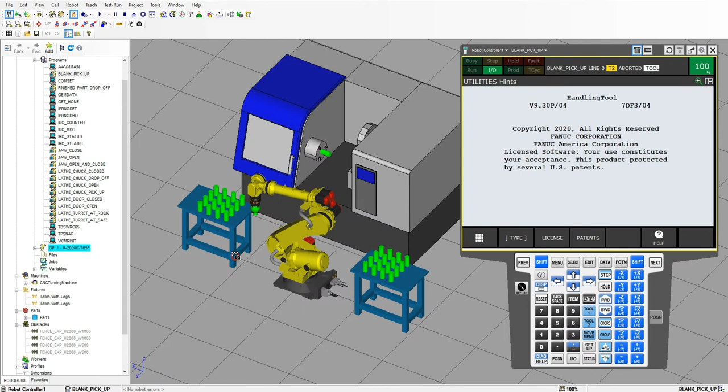Good afternoon. In this video, we're going to start programming our cell, and we're going to do this in multiple videos just because it's a little bit longer and we want to break up the videos just a little bit. But basically, we're going to start out with programming the initial pickup area. So let's look at some of the programs that we have created already.

Let's first look into the data registers that we are going to have set up. So the first data register is going to be a counter just in case we have it. And then we have our start row and column. So this is meant for counting which part are we going to be on per row and per column. We also need one for the end. So we did column end and row end. So this is going to be our placement.

Then let's go into our position registers. Inside our position registers, we have a couple saved points. The first one is this home position, which the robot is at right now. We have a pickup position, which is the first initial part. And then we have the lathe chuck position. And then we have the placement position. Now both the pickup and place positions are going to be changing as we manipulate that position register.

Going down, we have our offsets. So this is the number in which we're going to offset from left and right to do the rows and columns. So we have our offsets for the in feed, and then we have the offsets for the out feed. We also have a couple tool offsets because we're going to come down at a safe position and then back up to that safe position. We're going to utilize our tool offset. And then because we're in a little bit more confined space when it comes to the lathe, we made a lathe tool offset as well.

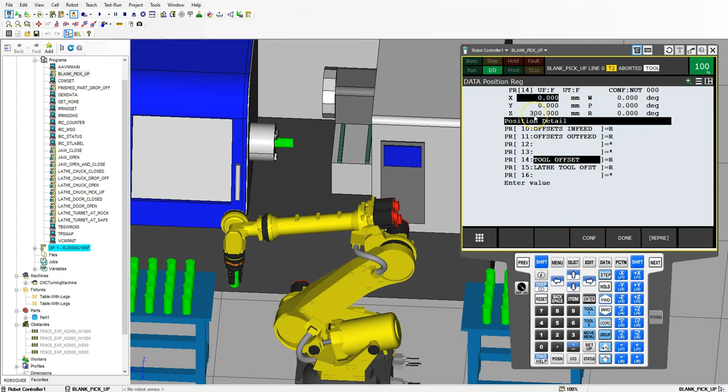Now the numbers that we put into this, we initialized it as zeros. We don't have to worry about this actual number because we're going to initialize it in our actual program, but just to show that it was at zeros, and we have it set at right now 300, but that may change depending on how the program actually plays out. So those are going to be the main position registers and data registers we're going to utilize.

We're going to be using tool frame number 1, which is our gripper, which we modified to be a little bit smaller so we can fit inside the lathe a little bit easier. And then we also have our frame 0, which is going to be our world mode, which everything's going to be based off our 000 for our robot. Going on up here, if I go to my blank pickup, so here's my pickup program. Again, these are simulation programs to represent that we are picking something up and then we're also placing it.

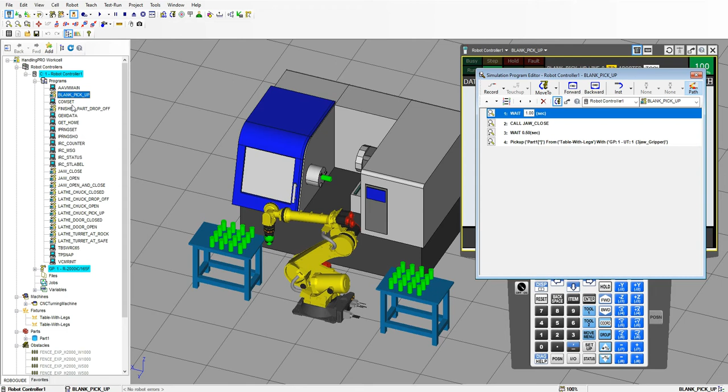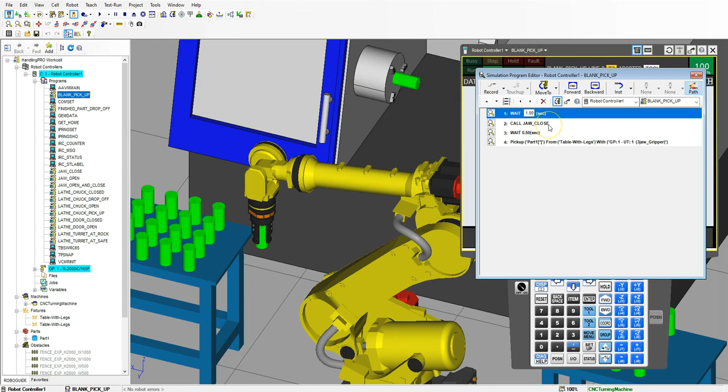In actual programming, you would have either a robot output or a digital output and picking up your device. So robot output may be hooked up to your solenoid or some sort of electronic device. So those are going to be your actual outputs. So that's where the simulation and the programming in real life differs a little bit. So if we go to the blank pickup, this is where we have the jaw close, and then we have the finish part drop off, which is over here. So these two are going to be the pickup and the drop off.

Then we have the programming for our actual jaw open and jaw close. So if I close this out and then I go to our program, so here is our jaw close, which is going to be a digital 1 output of off, and then it's waiting until that happens. And then we have jaw open, which means digital 1 is on, and we're waiting for digital 1 input to be on as well. So jaw open and close was a program that we did. We can actually delete this one so we don't get confused.

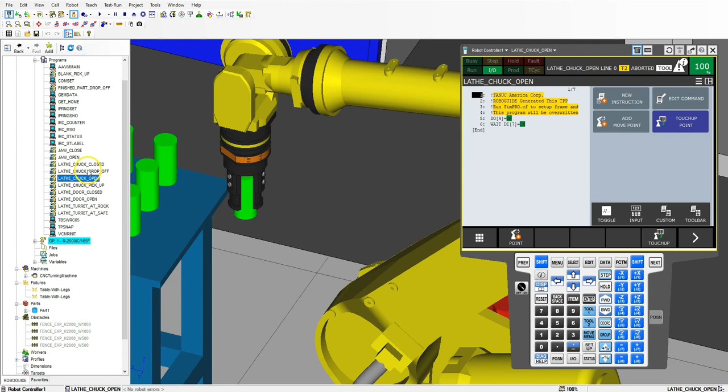Then we have the lathe chuck close and lathe chuck open. So these are just opposites from each other. We have the chuck drop off. So this is the program in which we drop off the actual part into the chuck. So you can see the lathe chuck opens, it waits a second for that to happen, and then it drops the part off, calls the lathe chuck to close, and then we close it. Then same thing for lathe chuck pick up. So when we grab it, then the chuck opens and then we move it out of the position.

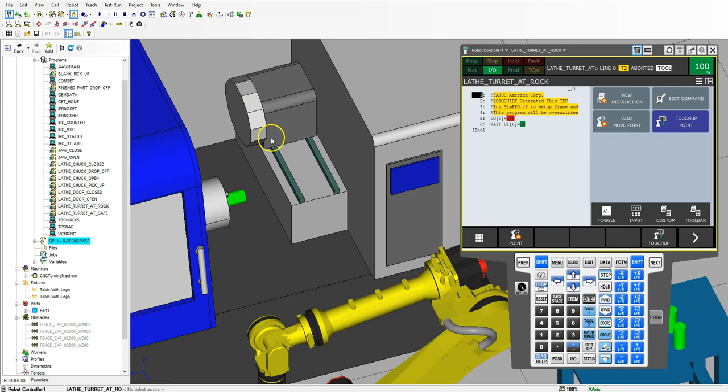We have the lathe door open and close. So basically these are opposites. And then we also have the turret at rock and also in the safe position. So at rock is forward, and then safe position is back. So those are going to be the main simulation programs in which we're going to call upon as we program our robot. Alright, so the first program we're going to create is getting the simulation to be in its start point.

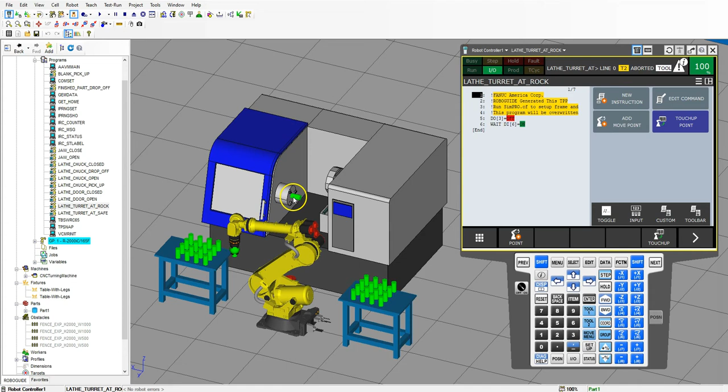So we're going to have our robot in home position, we're going to have our door closed, we're going to have this closed, we're going to have our turret towards the front. So everything initialized so that when we begin our program, everything is at the same start point.

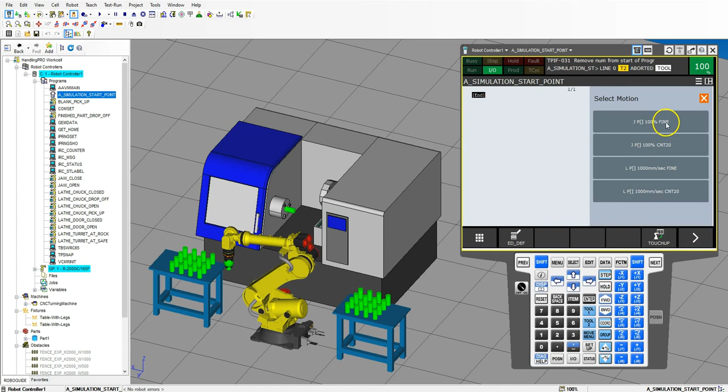So let's go select, and we're going to go create. And this time what I'm going to do is I'm going to put A in the beginning, underscore, and then simulation item start point. So the first thing we're going to do is we're going to make sure that our robot's at home. So let's go add move point, and we're going to do a joint movement, and we're going to use position register number 1, which is our home position.

Now later on we'll actually program a smarter way of doing home position, because right now, depending on where the robot is, if we call home position, it could crash into our devices or our lathe, and it could cost thousands of dollars to fix. We always want to make a smarter home position. So you saw in all these videos so far, I just called out a home position, assuming that the robot's not going to run into anything.

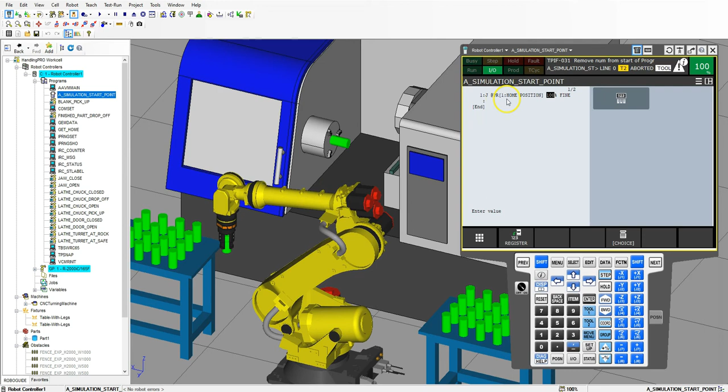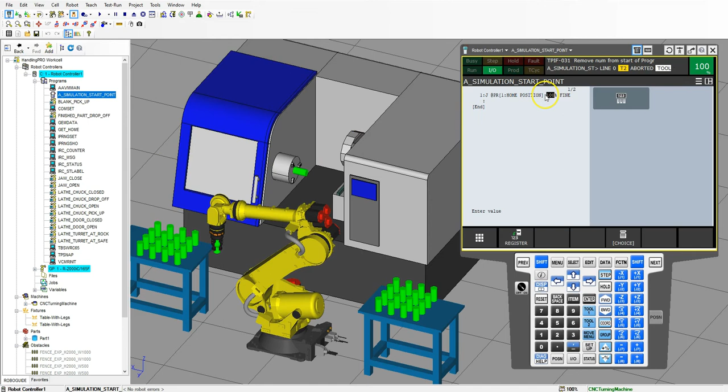Later on, we'll make a very smart home position in which it looks at where the robot is in relationship to the tables, the machines, and the fixtures around it. So it can make a determination based on where it's at to make the best course back to home position without crashing into things. But right now we're going to just call it as a home position because this is a simulation, and we will do this a little bit later.

Let's add the turret in the correct position. So let's go add new instruction, call program, and the first thing we're going to do is lathe turret in rock and roll position. So there's our rock and roll position. Then let's go down to end. Let's go new instruction, call. Next one is going to be the lathe chuck, actual chuck parts, going to be inwards, we'll call it. So lathe chuck closed, because we're going to open it. And then we're also going to call the door closed.

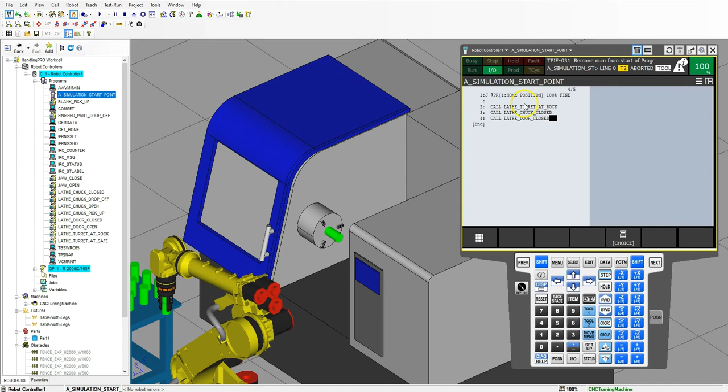So now that we have the lathe turret at rock and roll, we have the door closed, and we also have the chuck closed as well. So this is going to be our simulation starting point. So if we run this, everything is going to be closed, chuck's going to be closed, and then our turret is going to be also towards the front. Let's also make sure that our jaws are open. New instruction, call program, and then here's jaws, and we're going to have them open.

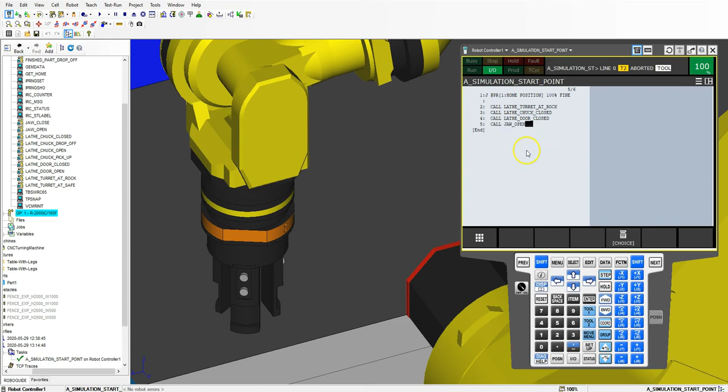So now that everything is set up for our first simulation program, let's make a new program called the master program. So we're going to go select, and we're going to create, and once again I'm going to go A, so everything's in the beginning part. So A, and we're going to call this master lathe program. Enter, and we're going to enter into this.

And the first thing we're going to do is set up our frames. So we're going to new instruction, miscellaneous, remark. Let's add frames to the beginning. And then new instruction, and let's set up our frames. So utool number 1, and then our user frame 0, which is going to be our home 000 based on the robot. Then let's go to edit command, EDCMD, and insert a bunch of lines. So let's insert maybe like 30 so we have some space.

Okay, so the first thing we're going to have is we're going to reinitialize our simulations. So we're going to go new instruction, miscellaneous, remark, and we are going to put in our heading of simulation item start point. So simulation items at start point. And then we're going to call upon that program. So new instruction, call program, and then we're going to have a simulation start point.

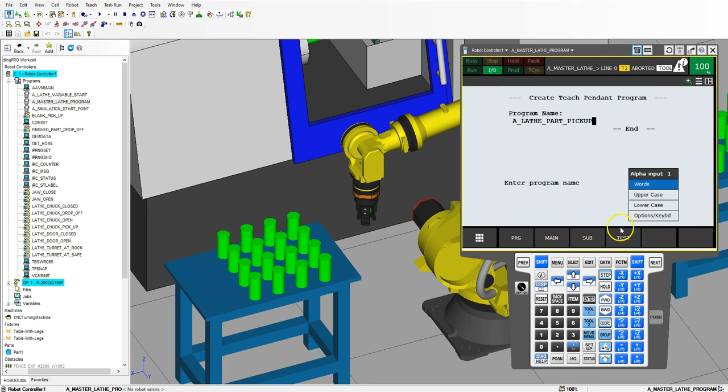So now that we have our variables, let's create our program for our lathe pickup. So let's go to the next row here. And then we're going to go part pickup. So let's create another program for part pickup. So let's go create. And this is going to be a motion program, so we're not going to change that first motion group. And let's go enter, enter. And the first thing we're going to do is set up to make sure our frames are correct.

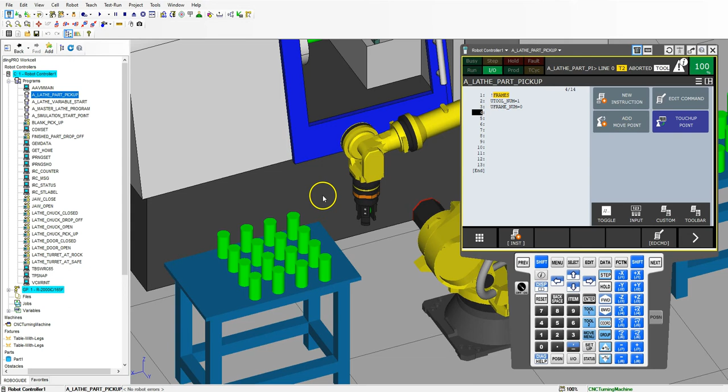So we got our frames. Let's go just like 10 lines or so. Alright, so now that we're in home position, let's just make sure we're at home position. Again, we will make a smarter home position later on. We got our home position, and now we need to go to our starting point. So let's actually go to our program. So this is going to be our actual pickup program.

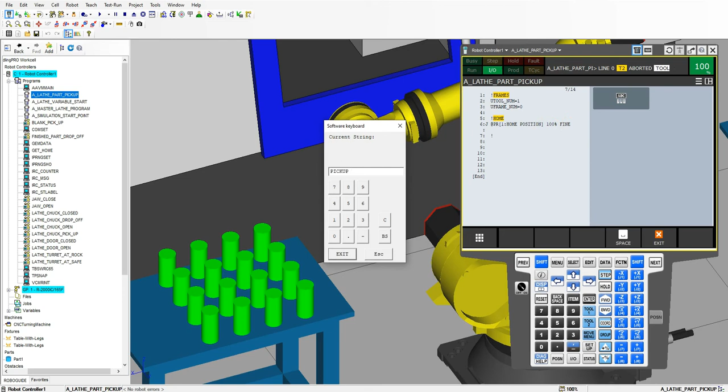So let's add a couple move points. So let's go add move point. And from our home position, we're going to go as a joint movement. Now before we change this, let's just go edit our default motion and make sure that they're what we want. So I have it set as 1000, 1000, continuous motion of 20. I usually go between 20 and 30, and then we have 100%, 20 point. So if you want to modify that before we start programming, just go into the edit add point and then edit our default there. So I usually call it edit definition, but it's just editing our default.

So we're going to go as a joint movement, and then we're going to go linear down to our position. So we're going to linear down to that position, and then we skip one line, and then we're going to pick up, and then we're going to linear back up again. So we're going to add move point, linear back up. So right now you'll see this as position 1, position 2, position 3.

We're going to use a position register for our point. So position register number 2 is going to be our start point. So let's go in here, let's go choice, position register number 2, which is our pickup position, choice, position register number 2, choice, position register number 2.

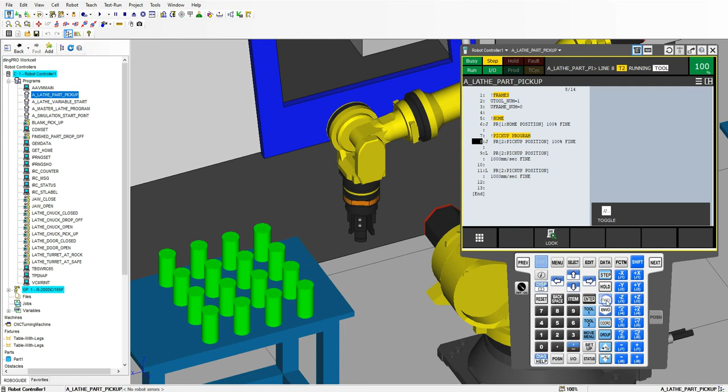So now what we can do is just go step mode and then shift forward, and it'll bring us to that position. So all 3 of these now have the asterisks because we are at that position. Now what we need to do is add our tool offset to this. So arrow all the way to the end and then go tool offset, position register, and we're going to use position register number 14, which is our tool offset.

Then it's going to go down to this position, pick up our part, and then linear back up to our safe position. So let's add our tool offset, position register 14. So let's try this out. Let's run this. There we go. So now we have our position register. Now we need to add our pickup area.

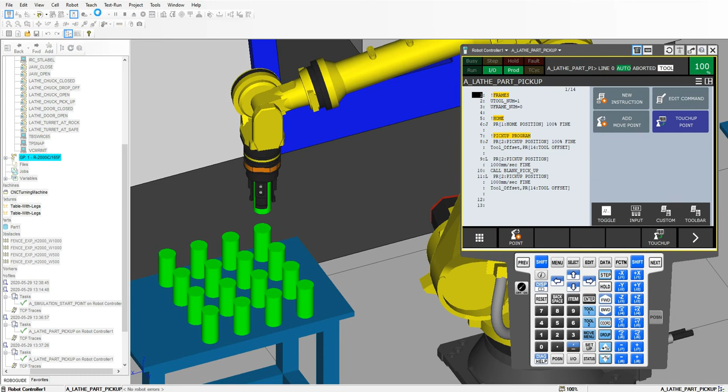So let's go to line 10, the one that we skipped, and let's go new instruction, call program, and then we are going to do our pickup. So the blank pickup, and that'll allow us to pick up that part. So if we run this now, it picks it up. And then if we want, we can go back to our home position afterwards, because it probably makes sense to swing from our home position over.

So let's go to number 12 here, all the way down, and then let's add our home position to the end here. We'll just clean this up just a little bit. So now what I'm going to do is add some headings here so that it's a little bit cleaner and we know exactly what's going on. So I'm going to pause the video and then come back and show you what it looks like. Alright, so I just went back in here and I cleaned it up a bit.

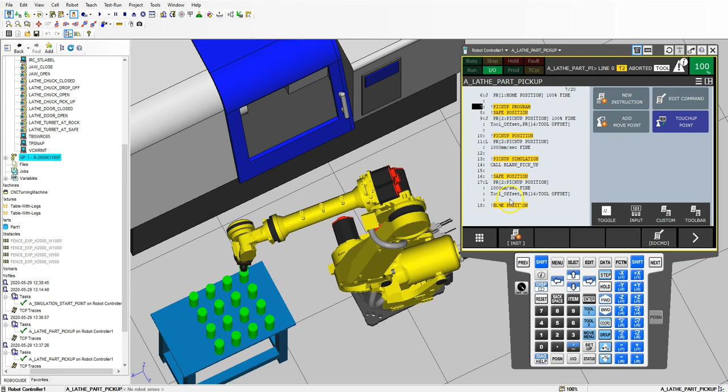So we have our pickup program. So here's our safe position. Here's our pickup position. Here's our pickup simulation. Then we go back up to our safe position, and then we go to our home position. So let's run this and see what it looks like. Goes to our safe position, and now we have our beginning part set up. Inside the main program, that's where we'll actually do the loops, but this is basically the same thing. It's just using the offsets that we're going to utilize.

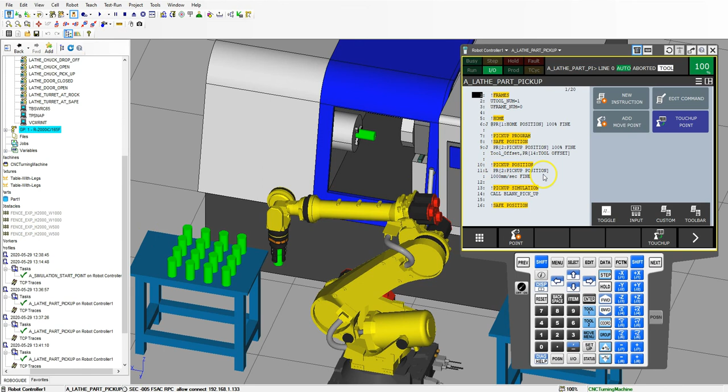So let's go in here also and add our offsets to our program so that we're able to offset left and right as we create it. So we're going to go to the end of our safe position, and we're going to go offset frames, position register, and we're going to use position register number... Let's go to data. Here's our offsets in feed. So we're using position register number 10. So let's go back in there, position register number 10. So let's do that for each one of these.

So just double check to make sure we have position register on each one of these motion groups. So we have position register number 2, pickup position, and we have a tool offset of upwards, and we also have an offset of the infeed. So that will allow us to shift over each time we do that for loop. Then we have the pickup position, so let's insert a line here just to make it a little bit neater. And then we have our position register, no tool offset for that. Then we have our pickup.

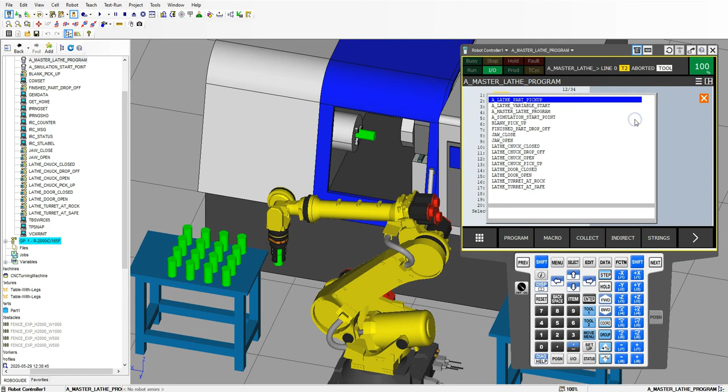Then we have our safe position that has the tool offset along with the offset position register. Let's add a line here as well. So now this program is all set up. Home position doesn't get any offsets. So this is all set up so that we can now pick up our part and use a for loop to shift over every single time. Let's add that to our main program. So let's go select, and let's go to master lathe program, and then here's our part pickup. So let's go add new instruction, call program, and then we have our lathe pickup.

So now when we run this, the whole thing runs to where it's supposed to be, and we have our variables. Alright, so when I was running this simulation, I kept getting an INTP-214 error, and after doing some research, that has to do with motion groups. So if I go into the actual motion group for my master lathe, I noticed that we had it as an asterisk. So let's go detail, and right now we have an asterisk here. Let's go to motion group number 1, enter, and then let's go back to that program.

So let's go to the end, master program, and now when I run this, I should not get an error anymore. So now everything is running properly. So picking up, and now we're at that position. So now we have our frames, our simulations, our variables, our pickup. In the next video, we'll move on to the placement table, and then we'll also work with our lathe part, and then we will do the for loops after that.